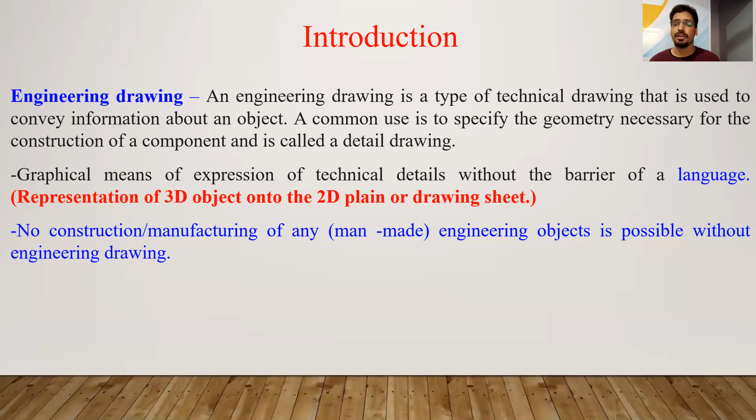So this is the basic of engineering drawing, I think this is clear. Next, what will you learn in this course? We learn how industry communicates technical information. If some industry wants to communicate technical information, how does that company or person communicate.

It includes, first, visualization - the ability to mentally control visual information. Second, graphic theory, that includes geometry and projection techniques. We will discuss these points in detail in upcoming lectures. Next, standards - a set of rules that govern how parts are made and technical drawings are represented.

Conventions are commonly accepted practices and methods used for technical drawing. There are some symbols which are common in engineering drawing that should be included. Next are tools, devices used to create technical drawings and models.

There are some tools which are used to produce technical drawings, some models, some software. Next is applications, the various uses for technical drawing. After learning the knowledge of technical drawing, we have to apply it in various applications. For example, if we want to manufacture an aeroplane, we must have a part drawing of it before manufacturing. We will learn these things in this course.

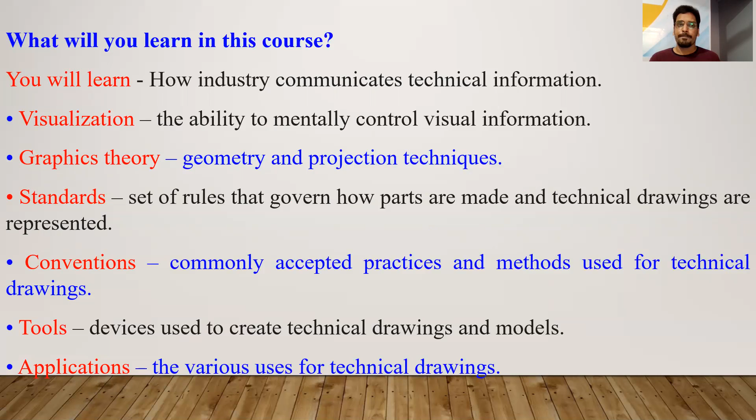So the question is, what is the application of engineering drawing? There are a number of applications of engineering drawing in each field of engineering, that's why it is common to all engineering branch students.

For example, in Computer Science, a CS student must know how the CPU is designed, and this can only happen when the student has knowledge of engineering drawing. How millions of transistors are fixed in a small place can only be done with the help of engineering drawing. If a computer science student wants to know how the design of a mouse is produced, he must have the knowledge of engineering drawing. So this is the application of engineering drawing in the computer science field.

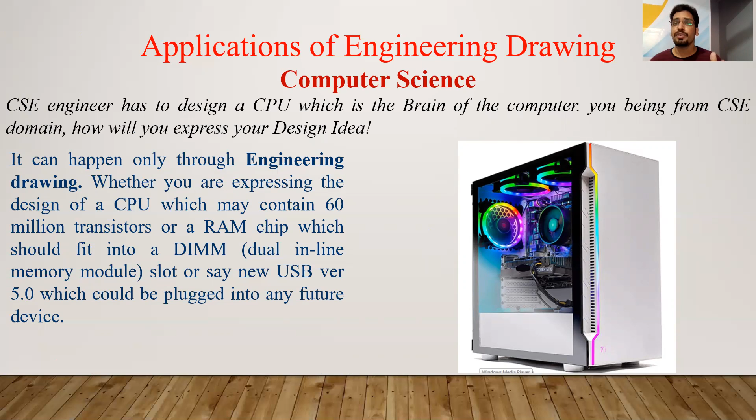Next, it is also used by electrical and electronics students to represent circuit diagrams.

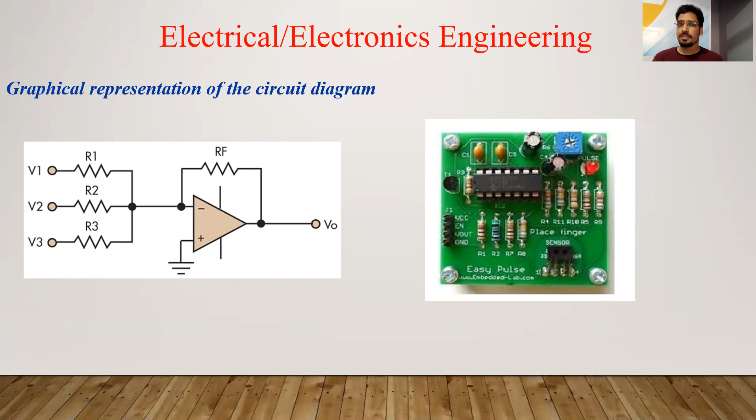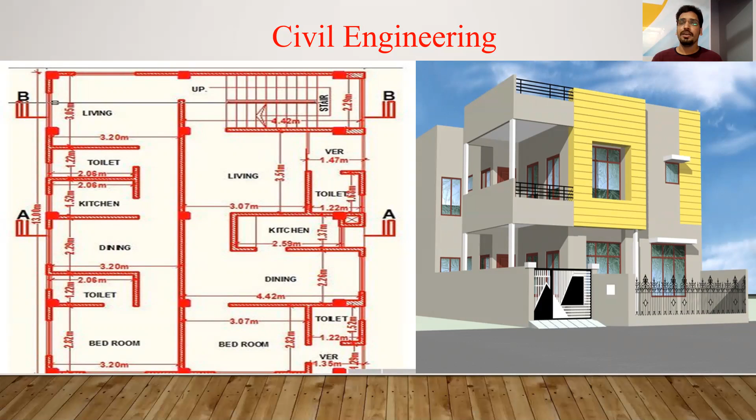Now, how are we going to start engineering drawing? Before that, we have to know what types of tools are needed to draw our engineering drawing. There are some drawing instruments like drawing board, drawing sheet holder, large size compass, small bow compass, protractor, French curve. These are the drawing instruments that we have to use in engineering drawing.

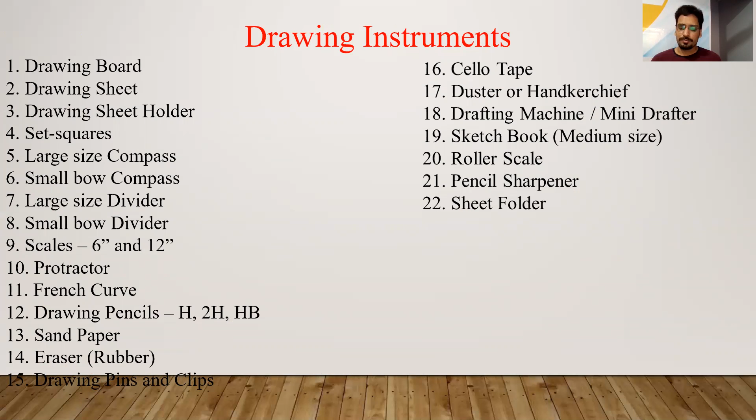Some of the important tools I am going to discuss. First one is the drawing board. Actually, we have to draw something by putting the paper on a surface, and that piece of paper must be kept on some table. So a drawing board is like a table.

Different types of drawing boards and their sizes according to IS classification are listed below. These are the sizes of the drawing board, and the drawing board looks like this: a rectangular piece of wooden board which is fixed to a movable stand. It has a flexible stand, according to which the position of the drawing board can be fixed at any angle.

The types of drawing boards are D0, D1, D2, D3, and these are their dimensions. D0 is 1500 into 1000 into 25, that is length into breadth into thickness. D1 is 1000 into 700 into 25. D2 is 700 into 500 into 15. D3 is 500 into 350 into 15.

So there is a common trend. If you look at D0, that is 1500 into 1000 into 25. The width of D0 becomes the length of D1, which is 1000, and half of that, 700, becomes its breadth, while the thickness remains the same. In D2, 700 becomes the length, which was the width of D1, and the width of D2 is half the length of D1, that is 500 into 15. D3 equals 500, half the length of D2, that is 350 into 15.

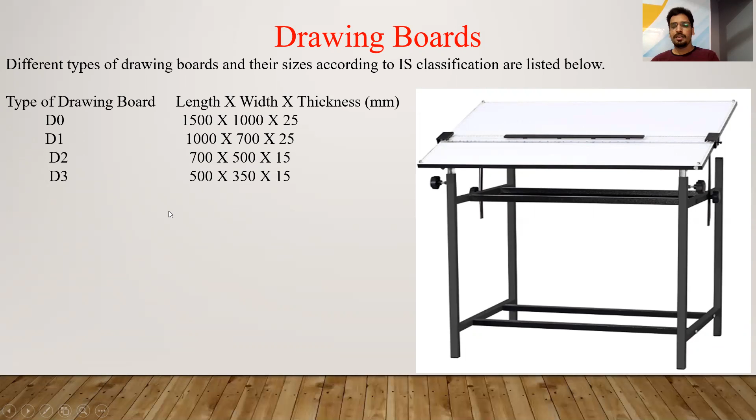Next is the drawing sheet. We have to put the drawing sheet on the drawing board to draw something. Various sizes of drawing sheets are recommended by Indian standards. There are 6 types of sheets that we use in engineering drawing: A0, A1, A2, A3, A4, A5. The dimension of the drawing sheet is given as length into width, so A0 equals 841 into 1189.

So it is very easy to remember the dimension of other drawing sheets, but you have to know the dimension of A0. A0 is 841 by 1189.

Now for A2, what we will do again: to get the size of A1, we fold A0. Now to get the size of A2, we will fold A1 along its length.

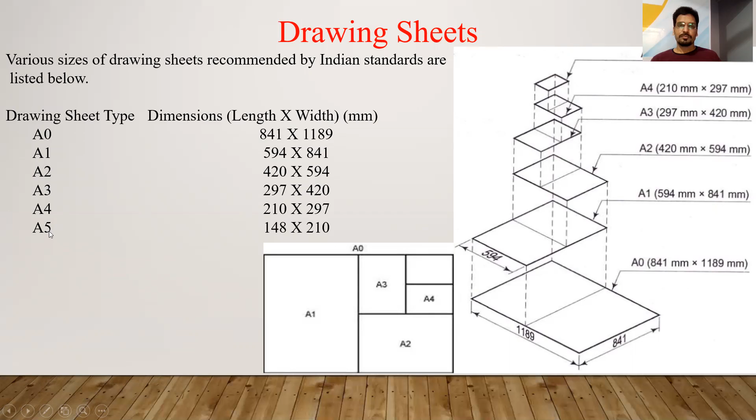So we can draw horizontal lines, vertical lines, inclined lines, parallel lines, and perpendicular lines with the help of the mini drafter. So this is one of the important tools for engineering drawing.

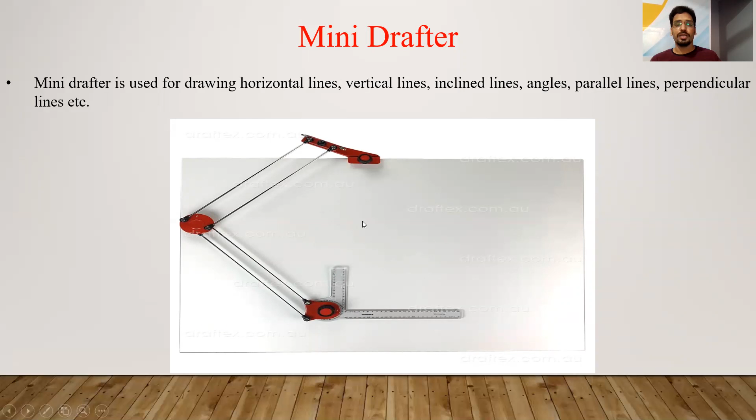Next, pencils. Pencils are used to draw on paper. Any type of pencil is not suitable for drawing. Yes, it is very important that we cannot use any type of pencil for engineering drawing. There are some limitations - the drawing appearance should be very neat and understandable, and every line of the drawing should indicate its importance.

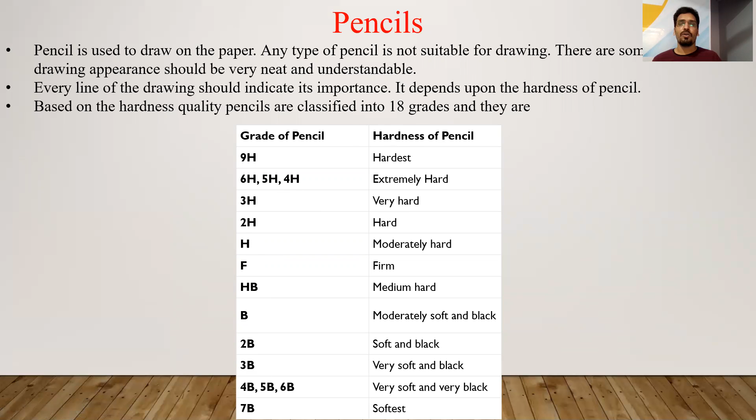But we don't use all grades of pencil in engineering drawing. We have to use some grades according to the need of engineering drawing. Out of the 18 pencil grades, the following grades are used in engineering drawing.

Grades of pencil: 3H is used to draw construction lines. 2H for dimension lines, center lines, sectional lines, hidden lines. H for object lines and lettering. HB for dimensioning and boundary lines. We will discuss the different types of lines in upcoming slides. So we use only these grades - 3H, 2H, H, HB.

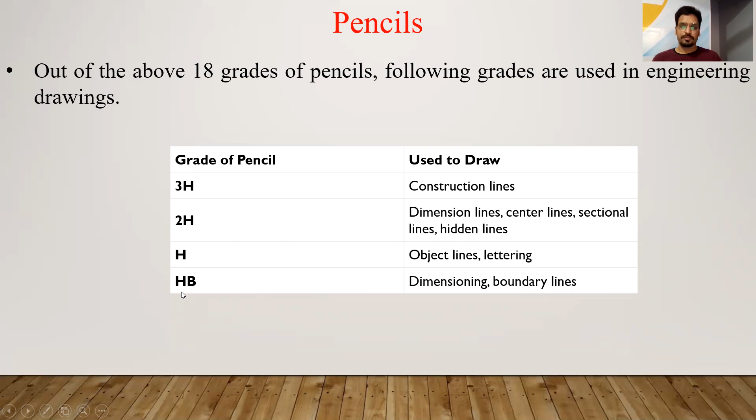Now we are going to discuss the different types of lines that we use in engineering drawing. Line thickness varies according to the use of the pen or pencil. The thickness of the line depends on which pencil is used, either 3H, 2H, H, or HB.

Line A represents the dark continuous line, and its general application is visible outline and visible edges. This dark line of the drawing is used to draw the outline and the main components of the drawing. We have to use this dark continuous thick line for that.

Next is the continuous thin line, which can be straight or curved. These are extension lines; I will discuss the use of extension lines and other parts in upcoming slides and lectures. This continuous thin line is used to draw extension lines, dimension lines, section lines, and leader lines, which are part of dimensioning. I will discuss these types of lines in the lecture on dimensioning.

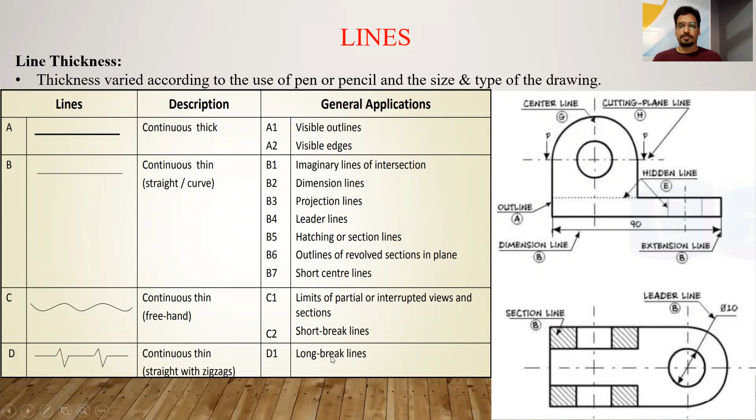Next is the dashed line, which is thick in nature and used to draw hidden outlines and hidden edges. If this is a portion which is hidden, some solid part not visible to us, we represent it by a hidden line. So this dash line is the symbol for the hidden line.

Then the dash thin line is also used to draw hidden outlines and hidden edges, like this one. This circle is visible, but if we draw its other view, it is not visible, so it will be represented by the hidden line.

Next, the chain thin line is used to draw the center line and the line of symmetry. If this part is symmetrical to that part, we can represent it by a chain thin line. So for center line, line of symmetry, and trajectory, we use the chain thin line.

Next is the chain thin line, thick at the ends and at changes of direction, which is used for the cutting plane. This line—dash dot, dash dot dot, dash dot—is used for the cutting plane. If you want to see the internal structure of a component, we use the cutting plane line and get a view like this.